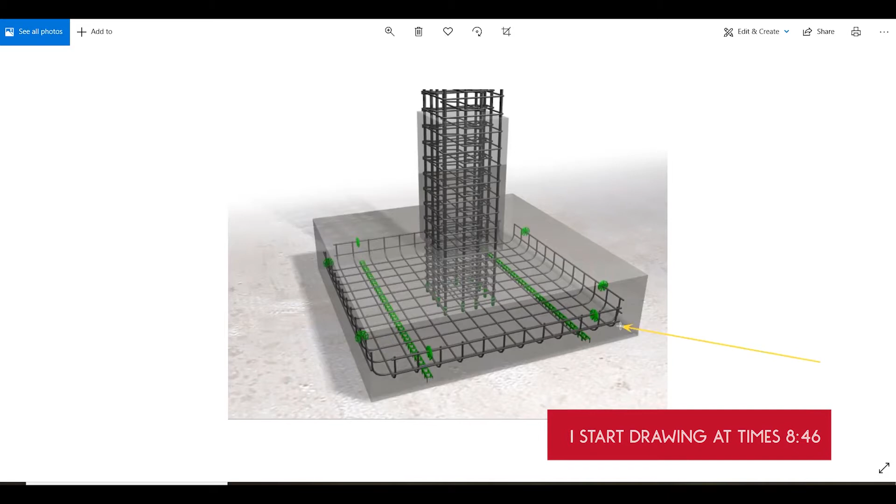We can just outline down here the concrete base. This is the concrete base, and this is the depth or the thickness of the base here. But what do we see inside? Inside we see the steel stirrups and the steel bars, all plaited and joined together to help make the frame stronger, right?

This would be considered the column shaft around here, going all the way up to where we will meet the floor level. Or sometimes these columns go all the way up to the roof level.

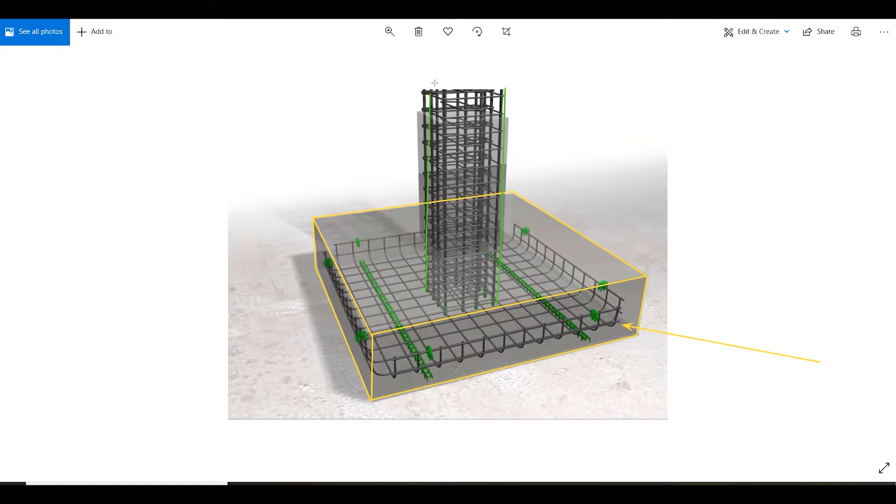But this is typically what a pad foundation looks like when we look at it in an X-ray style - X-ray meaning that we can see right through the materials, and we can see what the materials inside, how they are composed and how they join together and create a unit.

So let us clear this and move on and look at another example. This shows the same thing, however, this shows another view.

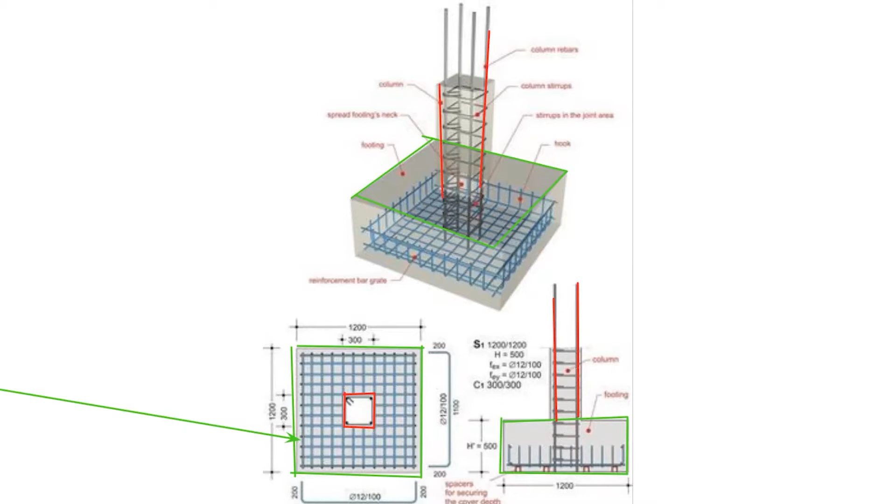And now I'm just going to indicate where the column starts. Column is right here going up, and these go up, and that would occur somewhere around here. So that's how the whole thing looks like when we look at it in isometric and in orthographic projection.

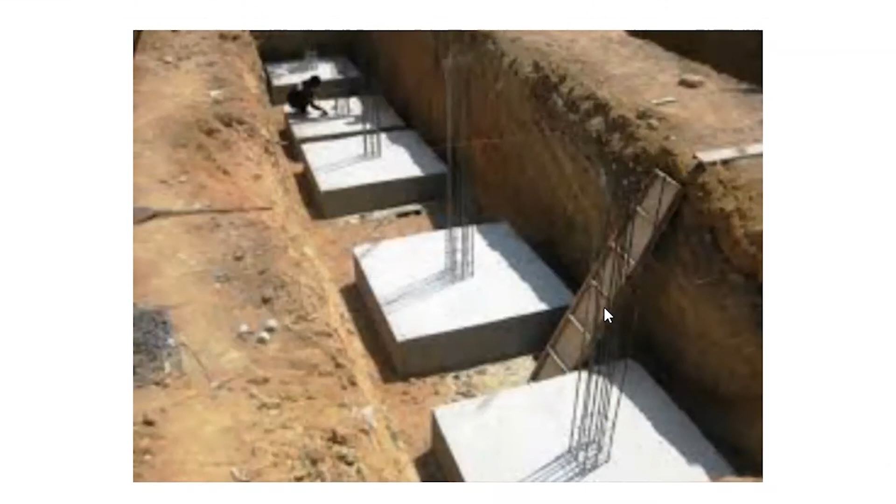And let's look at it now when you would put this down into the ground, when we dig a hole and we place this structure into the ground. This is what it will look like here.

I think this is fairly easy. You can see to the left and right is the ground, and you can see the columns there placed. So we see 1, 2, 3, 4, 5. And if you can observe, there's someone over here working on the column. So that's about it when we think of pad foundations.

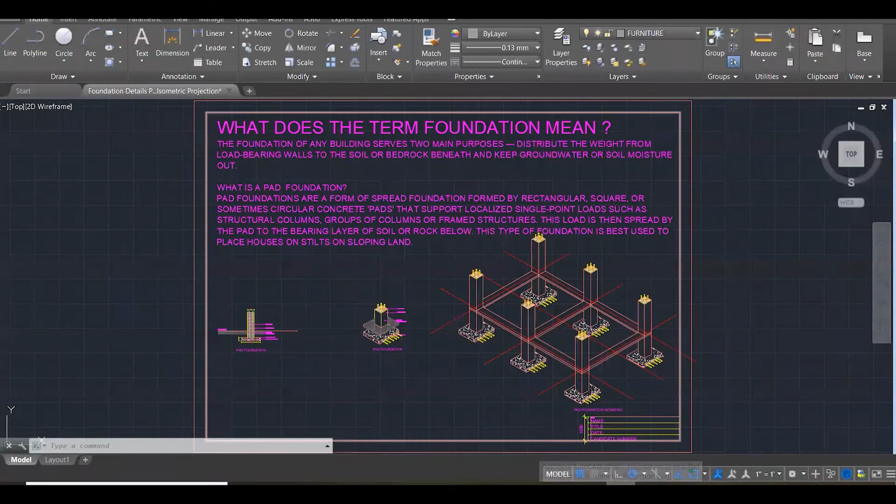And now let us go back over into AutoCAD. I need to show you guys what this will look like in three-dimensional form. Right guys, here is the pad foundation, and as we can see the base that is on the rectangular base here.

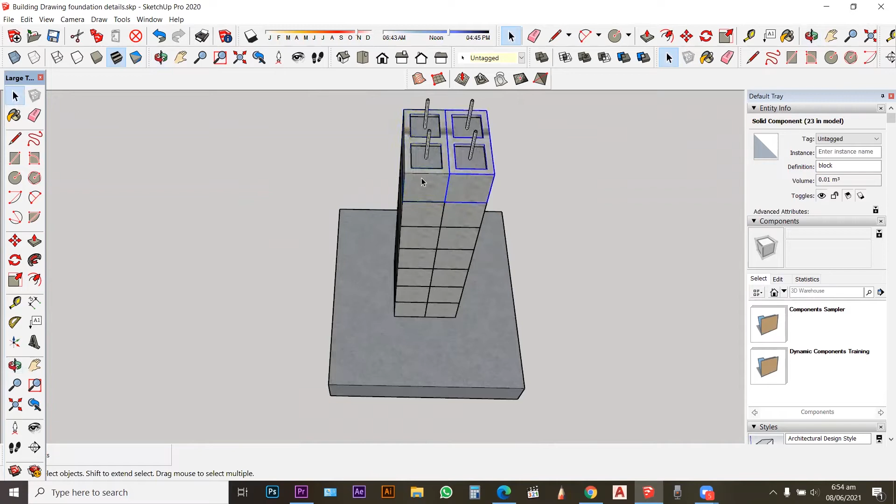And then we can see the block wall coming up, and we have 1, 2, 3, 4, 5, 6, 7 levels of blocks being stacked. And if you recognize that these blocks are also doubled up, which gives the whole thing a square look.

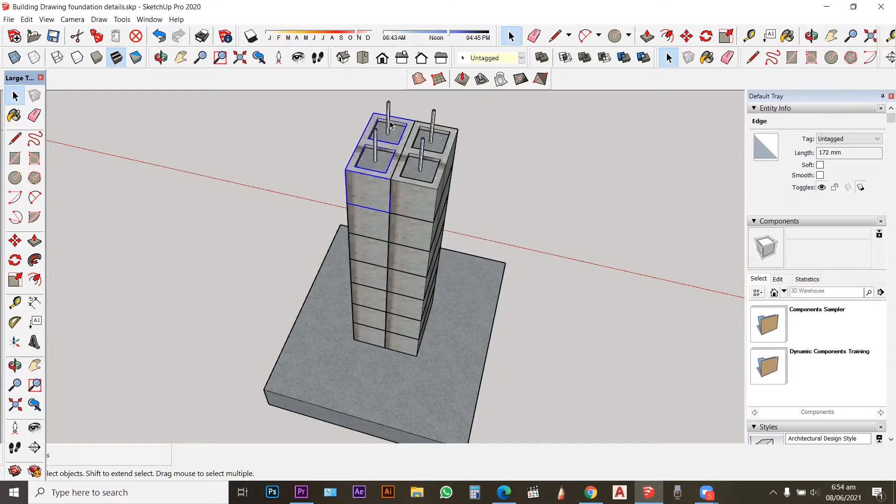And this is how the column would be created, and this is a pad foundation. And finally, we can see the steel that comes from the ground, from the base all the way up through the opening holes of the blocks. And then this would be tied to the beam at the top. This is what a pad foundation would look like when we just orbit around it.

We are going to be drawing this pad foundation in orthographic projection, and then we're going to come over here and draw it in isometric projection. But what we have over here is an isometric projection of a series of pad foundations all linked together. So we have 1, 2, 3, 4, 5, 6, and they are all connected. So this one shows a pad foundation in isolation, and this one shows pad foundation as a unit, to create one.

If this were a floor here, this would be the span, and we will fill in here as our floor level, in these two open spaces here. But let us get straight to what we're going to be doing.

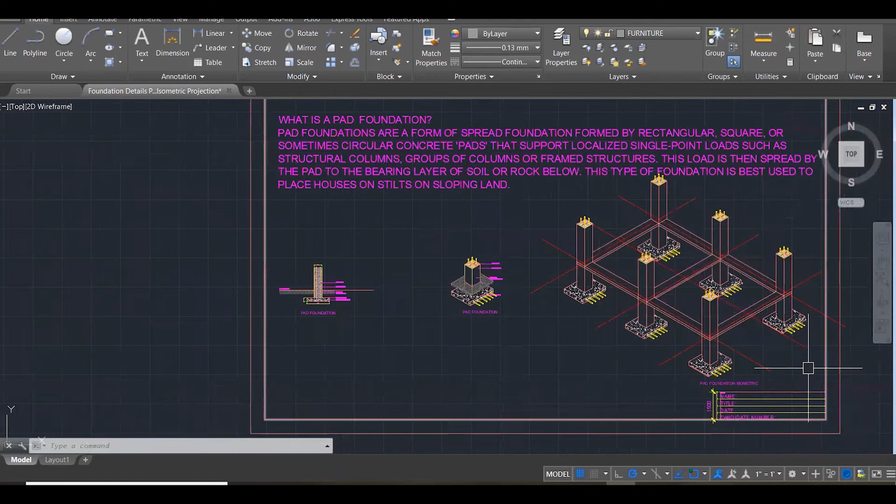Pad foundation, orthographic projection first thing. So let's look at this drawing. I'm going to reproduce this drawing, but let's read the drawing so that we can understand.

We are going to be using 200 millimeter blocks, but side by side, so that will give us a thickness of 400 millimeter. That's the first thing we need to observe. That's what that 400 millimeter stands for.

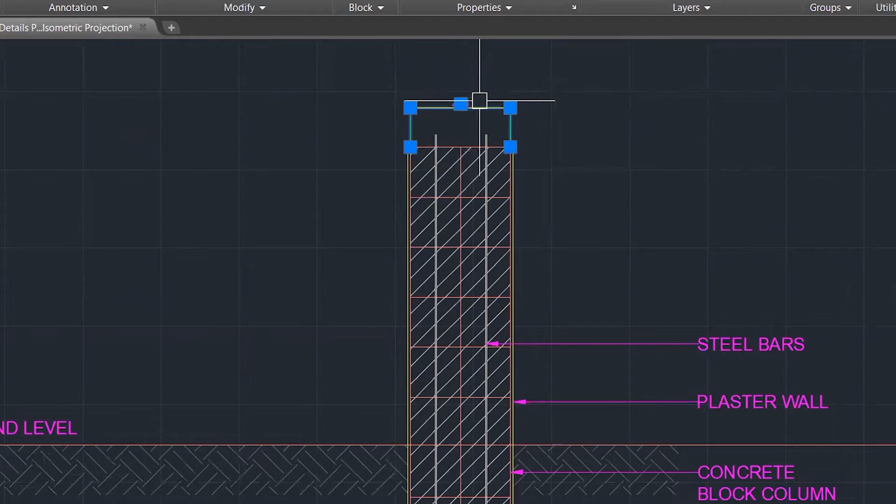What's the thickness of our base? The width of our base is 1200 millimeter, and the thickness is 200 millimeters. So that's a rectangle, 1200 by 200.

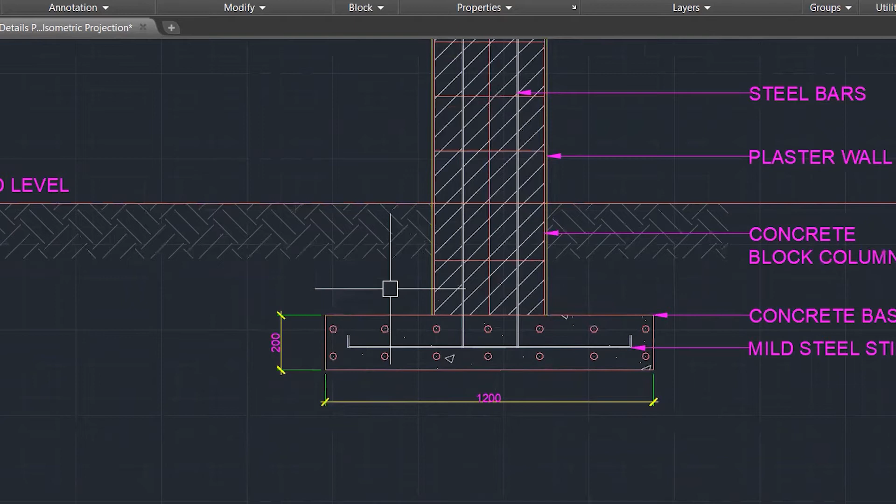And I usually go 7 courses of blocks, 1, 2, 3, 4, 5, 6, 7, 8. However, I went to 8 this time. You guys at home can go 7 or 8. Doesn't really matter.

So let us start off down here. I always struggle as to where to draw, because I want you guys at home to be able to see as I'm drawing what the finished product would look like. So I'm going to probably start here.

So let me go on to my outline layer, and let me change this over to the ortho mode. To access your ortho mode, it's down here, you can press F8.

So let's go 200. Let's go across 1200. Then go up 200. Let's connect this right here. So it's been connected there.

Let's find the midpoint of this. I find the midpoint, and then I project a line upward.

Now I'm going to offset 200 to the left and 200 to the right. Remember, because our bricks are 200 thick, but they're 2 courses laid next to each other, so that's a 400 thick wall. That's what our column is going to be, a 400 thick millimeter column.

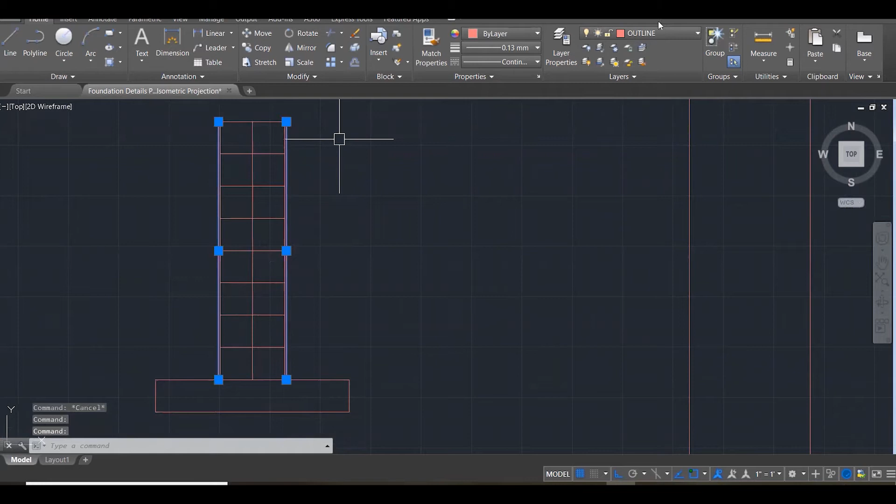Now we don't really see that, so we need to put this into a different layer. So I'm going to come in, zoom in, and select these two outer lines, and I'm going to put them into my construction layer so that from a distance we'll be able to see the plaster walls.

Let me put this back in frame. Now, what do we need to do? I need to assume a ground line. So I'm just going to randomly put a line. That's my ground line, right?

Sometimes I like to connect. Yeah, that's like that, that's a ground line. Now I'm going to offset 100 down because I want to give my ground a thickness.

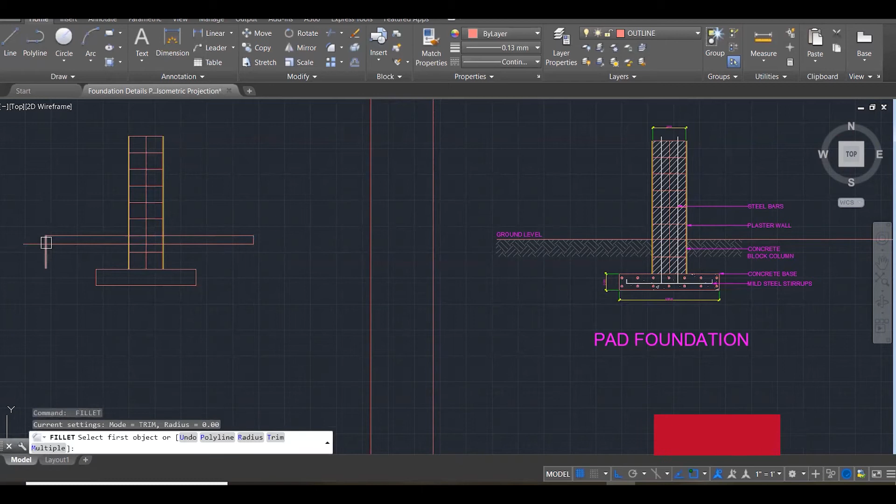Doesn't matter, well, I try to give it a reasonable thickness. The reality is that the ground goes infinite, so you can't really give any thickness for the ground. But however, in representation, we need to give this ground a thickness. So I've just given that a thickness of 100mm thick.

I think I might increase that to another 100. Yeah, it looks like it's a bit too thin. So what I'm going to do is I'm just going to grab this.

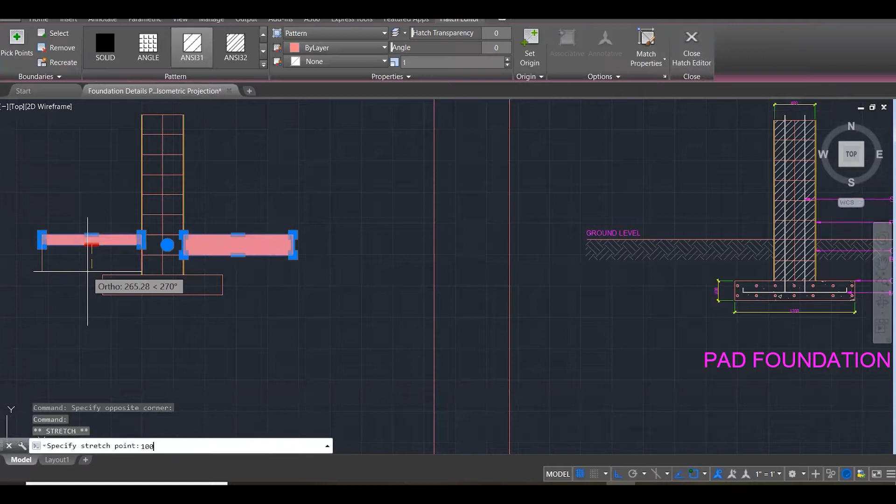So I can remove the bottom line here, and I'm just going to grab the hatch. Then I'm going to pull this down 100. Yep, do it on the right, no, do it on the left. Pull down this solid hatch 100. I always grab the midpoint here and I stretch it.

So now I'm going to match prop this, MA, to match prop. I'm going to grab the ground level hatch from this already drawn, this finished drawing, and I'm going to transfer it over here.

So there's our ground level, and that's our columns, this is our concrete base. Now, we need to hatch in here.

Just place a solid in there and match prop this. Come over here, match, prop. Simple like that. So that changes to concrete.

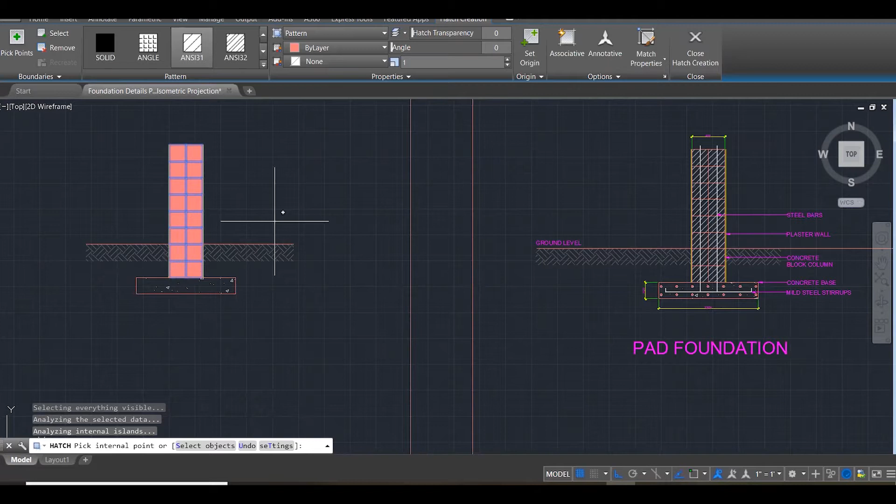Now what we need to do is hatch in here next. Again, I'm going to fill this with solids and then just change the pattern. So it's all done. Matchprop MA, or we can go out here to match properties.

So far so good. Now we need to add some notes to this, and we need to also add the steel. So let us put in the steel.

I'm going to zoom in here and start by putting the steel in. I find the halfway point, project a line to the left, to the right, and I'm going to find this halfway point here. Oh no, we can't find that.

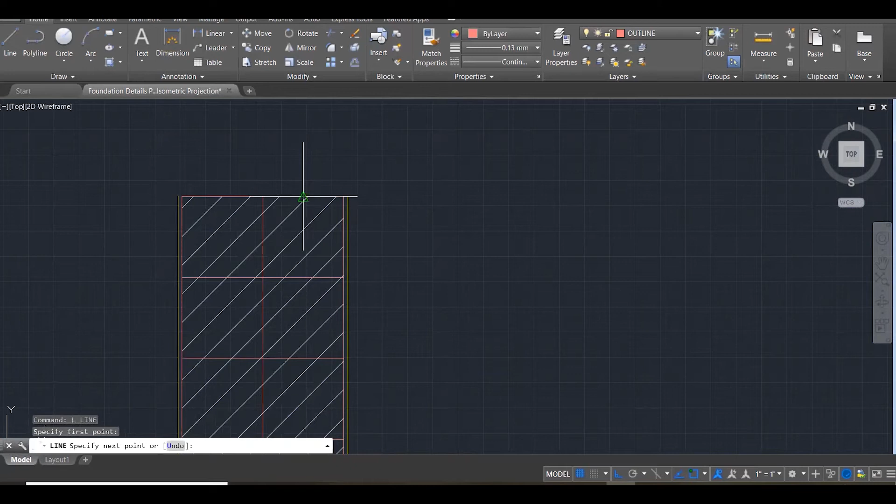So what I'm going to do is break this line there, extend that to there. Now I can find the halfway point there. Now I can project this down so that connects there.

I'm just going to project the steel slightly above the course of blocks. I'm going to copy this, CO to copy, grab that line and place it over there.

Now I want to place my steel in a different layer. I'm going to place my steel in my hatch layer. And that's my steel in.

Now I need to shape it. So I'm going to offset my steel and give it a thickness of 10 mil.

Good. This is where I'm going to end my steel. Offset that 10 mil.

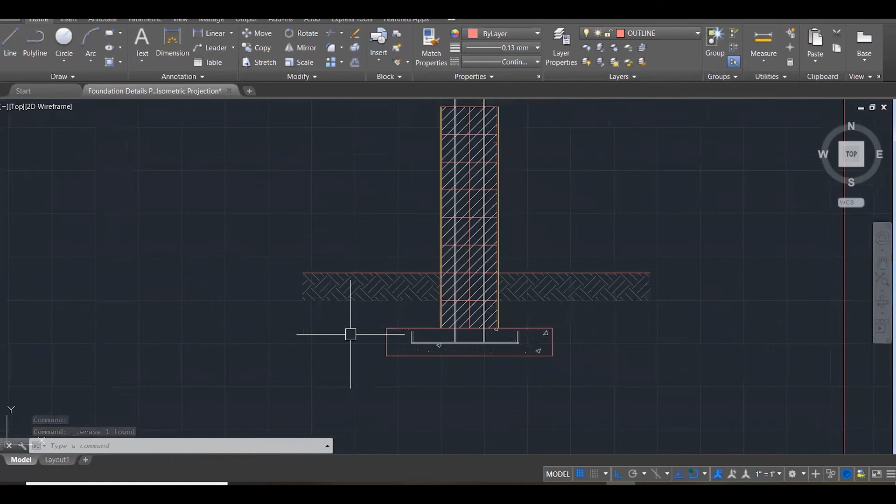Okay, so now all the steel is in now. Just going to make sure all the bars are within the same hatch layer. Okay, I think everything is good. That looks good. That's our steel in, and that's our stirrups.

Now what we need to do is put in our steel bars, and I'm going to grab them from here. Actually, no, I'm just going to create new bars. I'm going to come here and create a bar circle.

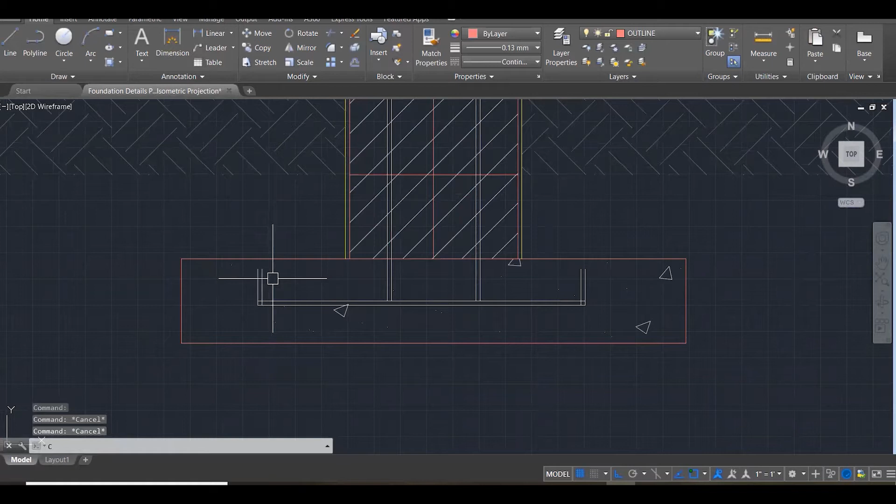I'm going to make my radius 10 mil. Yeah, that's it there. And I'm going to place these in here.

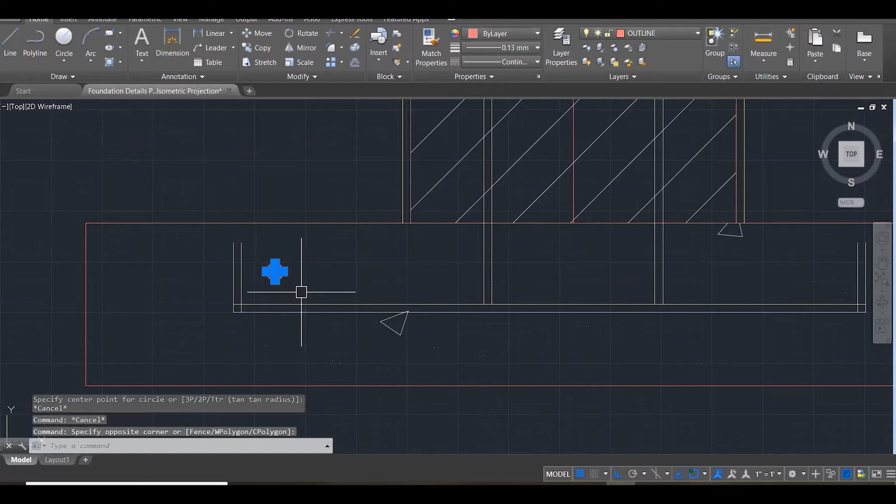I said distance. What distance am I going to use? So let me just draw a line. You know what? I'm going to divide this here, div, to divide this line. And I'm going to go with something like 8 divisions, right?

Now, why didn't I see the divisions? I need to adjust my point style. And now the divisions appear. It's good, perfect.

So I'm going to place them down here, and then I'm going to move them up like this now. Grab them all together, and then let's go copy. So we get a set of bars there, and we get a set of bars under here.

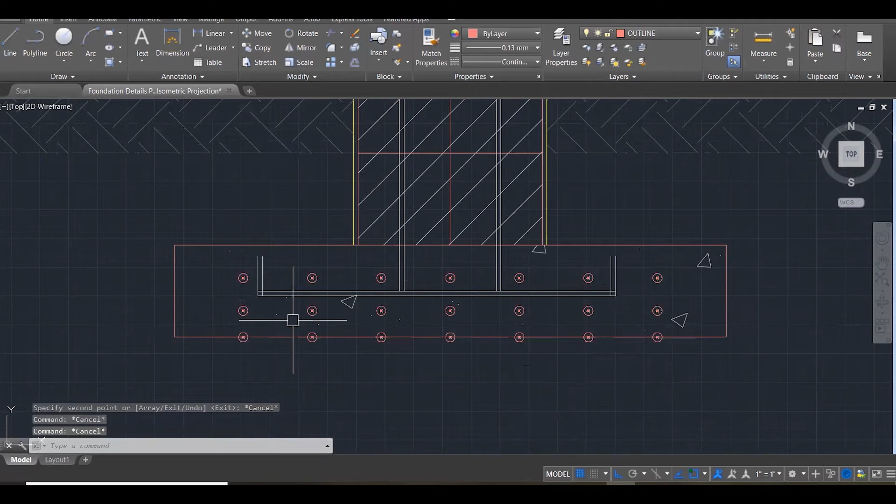I think that's good enough. And then I can delete those. So those are my bars in there.

Let me take off my point style and put it back to a point, or speck of dust as I like to call it, so that we can't see it any longer.

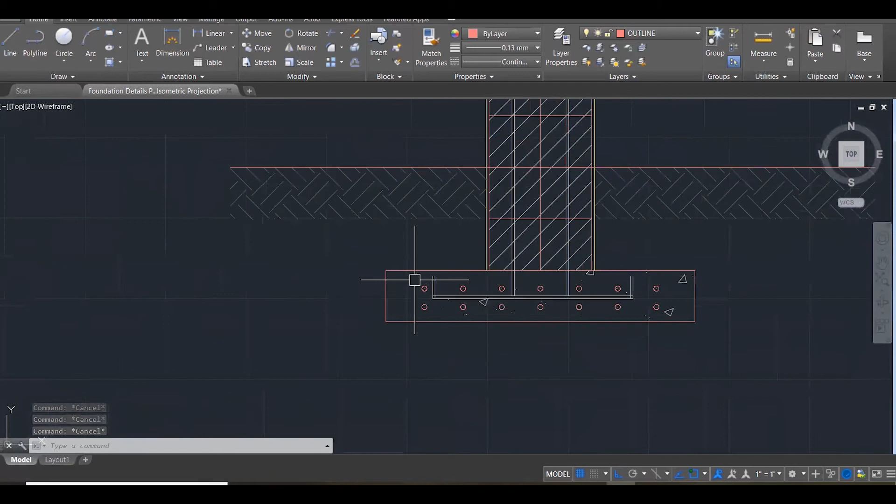Now, change these bars and place them into my hatch layer. Okay, that looks good.

So that's a good representation there. Now let us transfer the labels.

This line here is the ground line. This is the line that you will be walking on when you're approaching the building. So let me just identify that.

Grab the note here from on this drawing, and we'll just place it here, right? That represents the ground level.

Now, let's set up a margin over here, and I'm going to be placing in some notes. So I'm going to go over to my text layer, and let's see what we can place in here.

Let me just move this whole structure closer so that we can see what we're doing. Okay, so the first thing we need to do is identify what happens here down at this sub level.

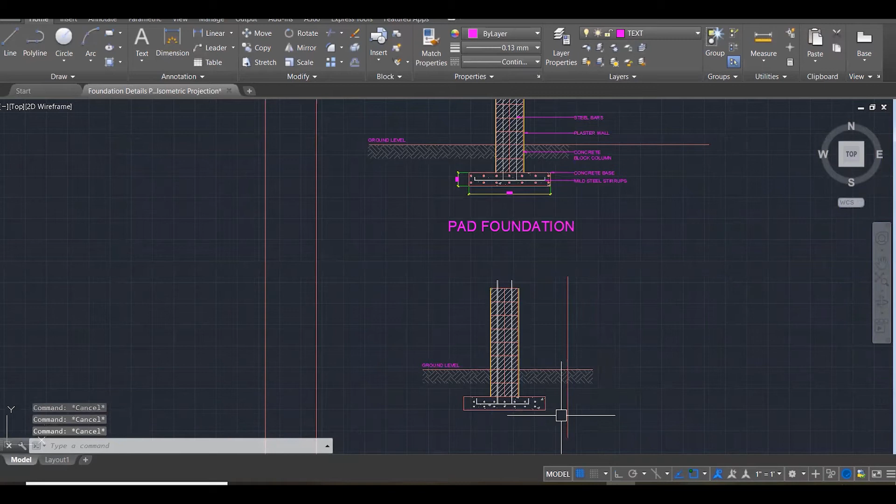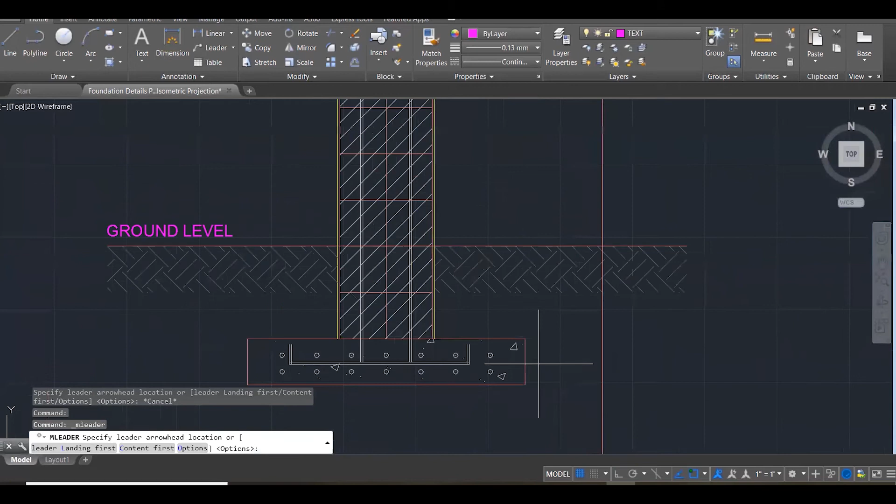What I call the sub level is the level that's under the ground. So I'm going to identify this, and that is our concrete base.

And now let us come up. These here will be bars, steel bars.

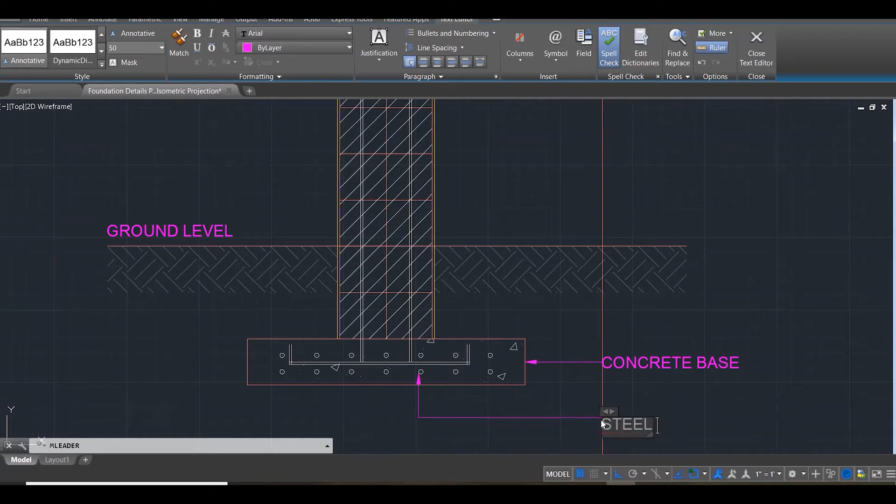These are the steel bars. And these will be the mild steel stirrups. Actually, I'm going to label this as the mild steel stirrup here, and then identify the bars somewhere else.

Right, mild steel stirrups. Over here now would be, let's call that the plaster wall.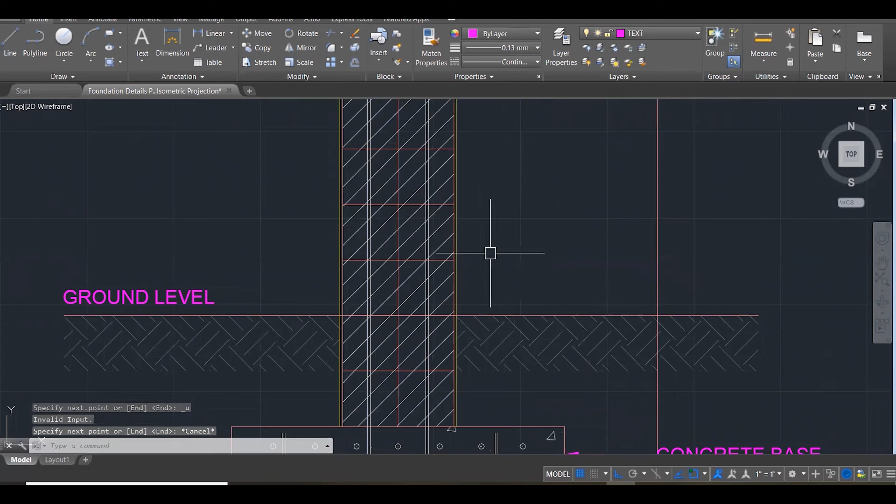Oh, that's not straight. That's not straight. Plaster wall.

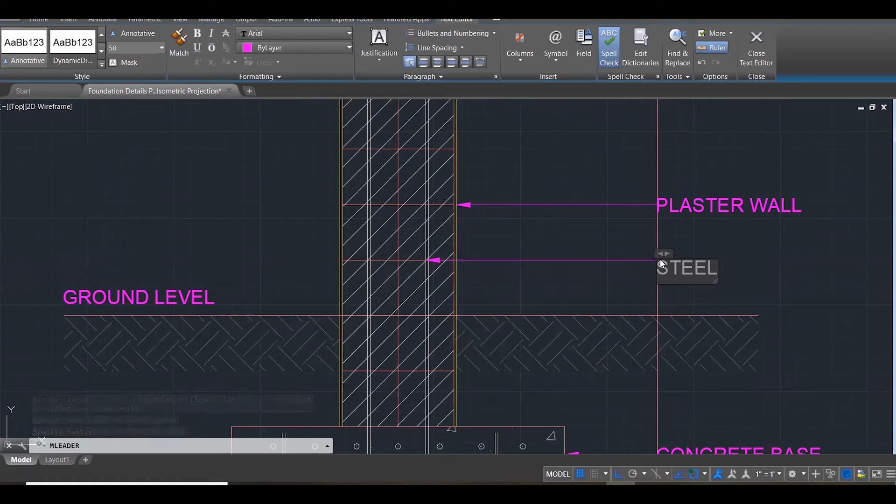Steel bars. And this will be our block work.

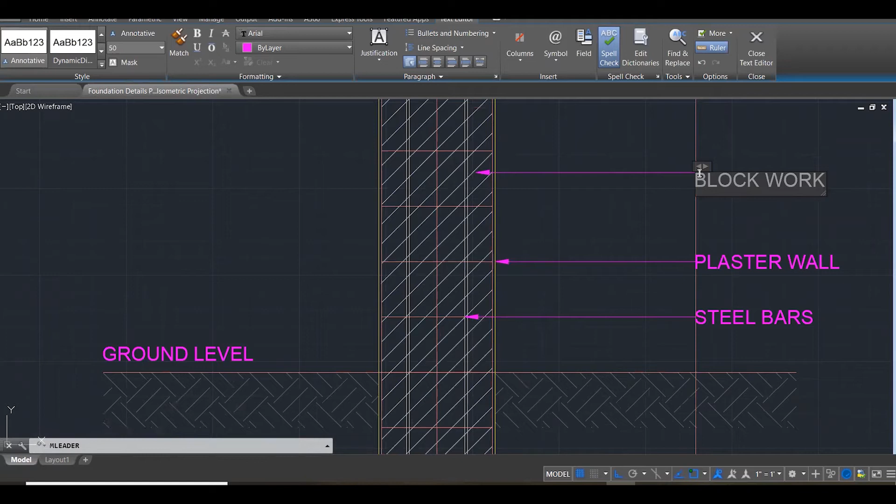Block work to form columns to create. Let me just put here block work slash column wall. Column wall.

I think that's it. So we got our block work, which is the column wall. We got our plaster wall. We have our steel bars. We have our concrete base, and we have the mild stirrups.

And these are the main things that we need to identify so that we can demonstrate to someone that we understand this detail. Now I'm just going to remove this line here. This was a margin line to make my notes very neat.

I'm going to copy the word pad foundation up here and bring it down, so we know what we're doing. That's the first part finished, which is drawing the orthographic projection for the pad foundation.

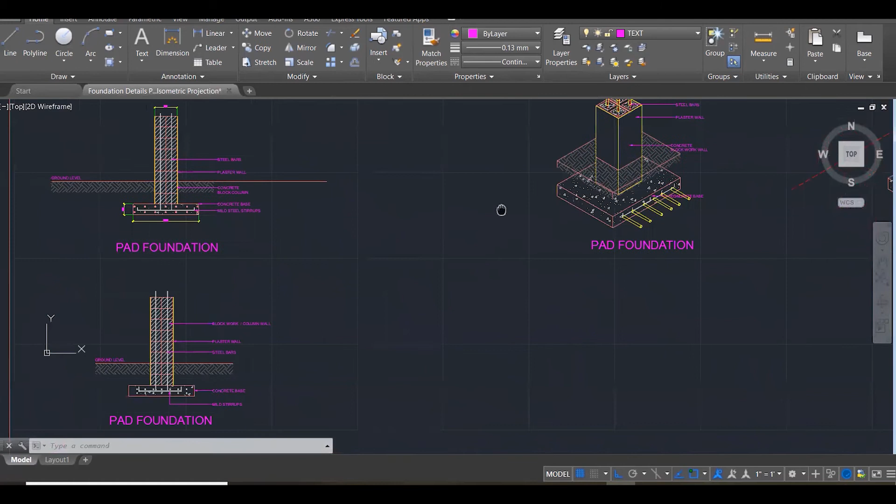Now let's move over and do the isometric projection. In doing this, I want to use a different technique. Before, you guys saw me go over to isometric drafting and turn that on, but I'm not going to use that as the main tool today when drawing this isometric.

I'm going to be using polar tracking. Let me show you how I'm going to set this up. Watch closely - I'm going to open up the arrow, press it, and choose my tracking settings.

Now, I like the tracking setting 30, 60, 90, 120. Why do I like that? Because it allows me to draw my isometric projection without having to switch the tracks every time I want to change direction.

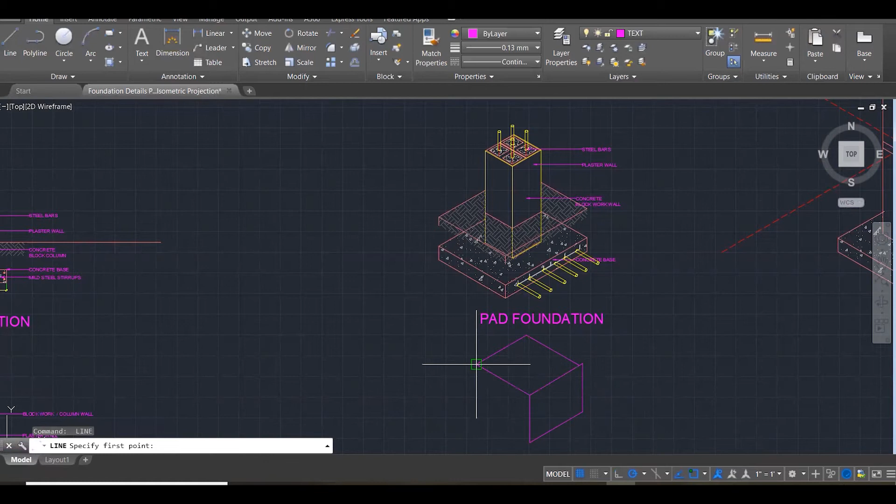Let me show you this quickly. So I can draw - that's 30 degrees - and then I can come up, and do things like that, right? That's simple, without me having to switch the track. This is just an example of how I'm drawing without switching the tracks.

If I were using the ISO drafting, if I want to go to the left, I will have to stop and come down here and switch over to the left track. If I want to go to the top plane, I will have to switch from left to top plane. But in this polar tracking mode, you don't.

Once you know the direction you're going, you just hint the mouse in that direction and it will provide the angle needed for that direction, and the angles are all preset. I hope you guys understood that. Let me demonstrate how I'm going to use this tool now.

Okay, so let's draw the base first. We know our base, we go up 200. Then I know I'm going to go across 1,200. And then I know I'm going to come back down 200. Then I'm just going to join that there. So that's our base.

This also goes 1,200. Oh, oh boy, I dropped it. So let's do this again.

Up 200, across 1200 at 30 degrees, come back down 200. Let's connect that there. Good. So that's one face drawn.

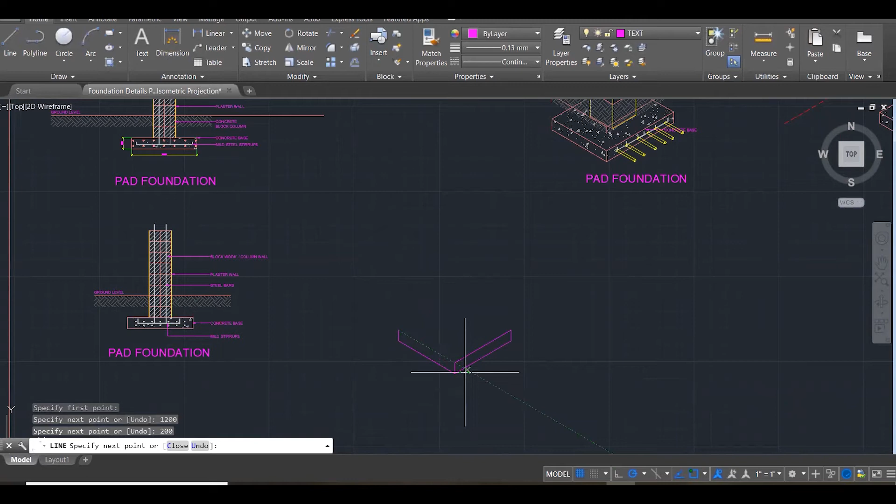And then I'm going to draw the receding face down 1200, go up 200. So that's my receding face there, and I'm going to copy that. Done, done. And that's how we get our box, right? And these are the parts that we're not going to see.

So that's cool there with me. Let me just put this into the proper layer, which is outline. And on that note, I'm going to go onto my outline layer and continue drawing from there.

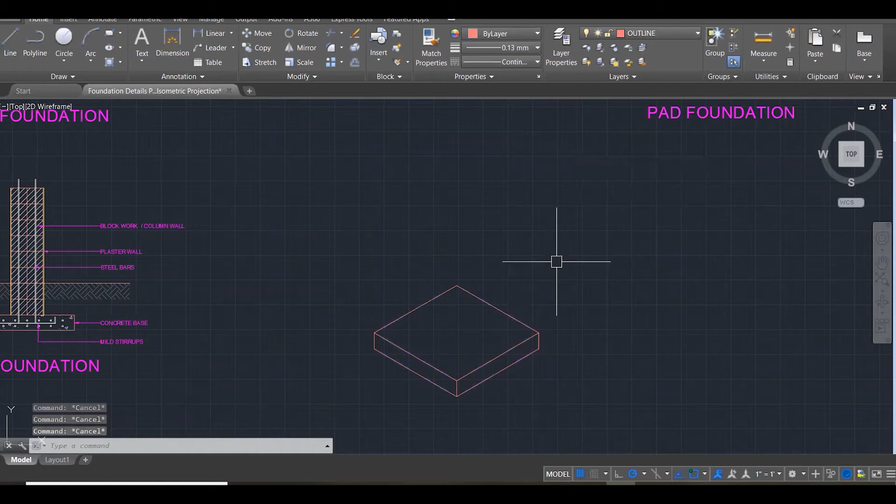So now that we have this, we need to establish the midpoints, and these are our midpoints. This is where I'm going to cast up my 200 millimeter wall.

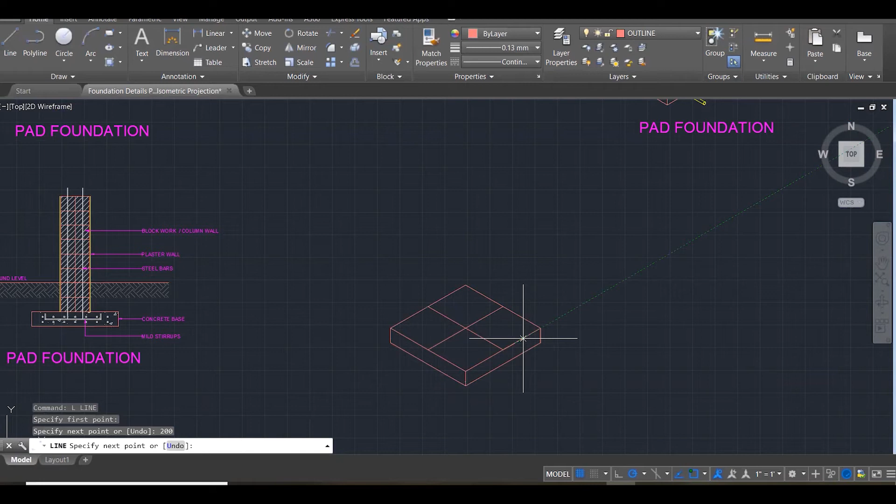Now, let's go here to the left and to the right, 200. Let's go 200. 200 in this direction.

Okay, so we should have something like this. We should have a square in there. Now what are we going to do with this square?

Now we're going to go up and project this upward. And I'm going to trim in here because we don't need these pieces. Let's copy this around.

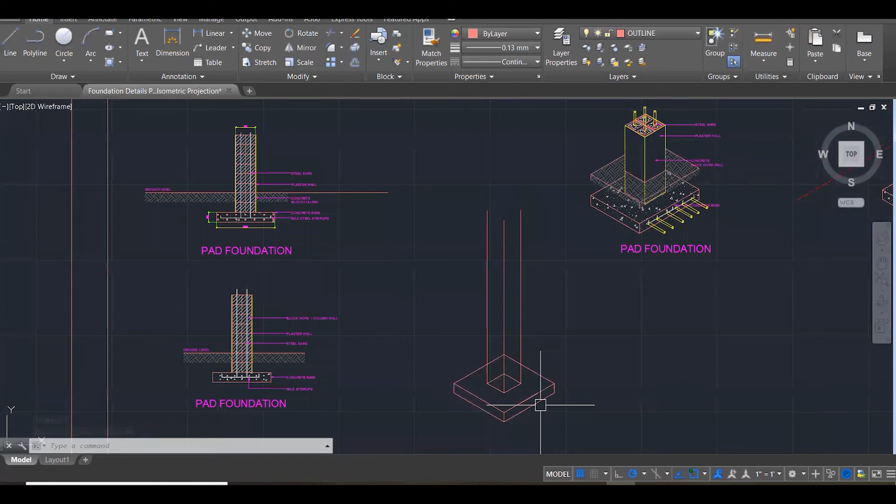Let's remove these bits, we don't need these bits here. Serves the purpose, and now this is it, but we don't need to detail this. So let's assume a point where we're going to stop, and I think I'm going to stop around here. So I'm just going to - yeah, that looks good. Let's trim off here.

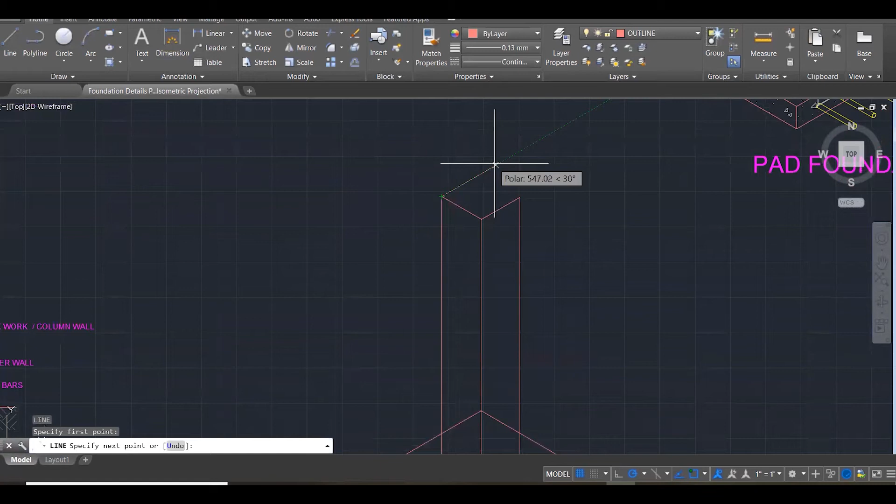And again, I just assume a random place. You guys got to get the idea of drawing random sometimes - there isn't any measurement, you're just drawing it in the form of sketching. So when I say draw random, this is a random height, not a height that I'm trying to match from here, because the height doesn't really matter. All that matters is that you express the detail. It doesn't matter the height, it can go up to whatever. Just get it drawn, so stop worrying sometimes about not knowing the height, and just put in a height.

All right, let's go on now.

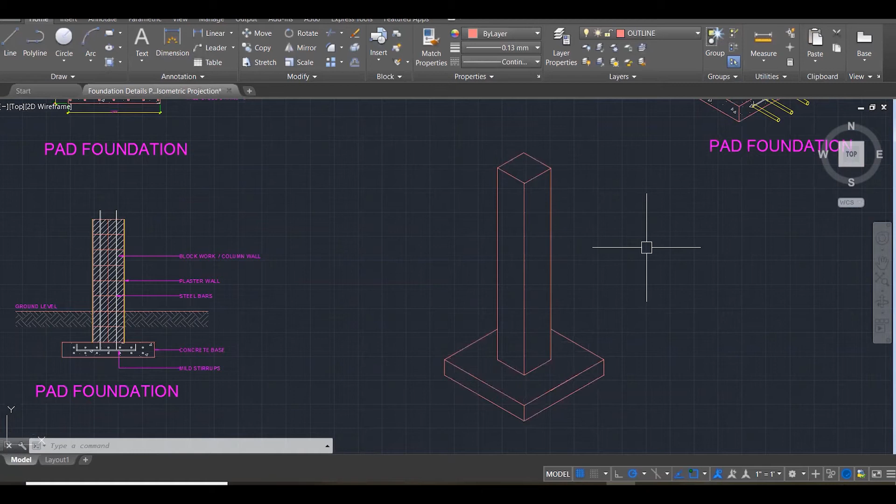So this is our column connected to the concrete base in its raw form, just like that. Now what we need to do is detail this. Detailing is a way of expressing this so someone can better understand what is happening up here.

Let me offset 25 mil all around. Why am I doing this? I'm actually inserting the holes that go in here - these 4 holes.

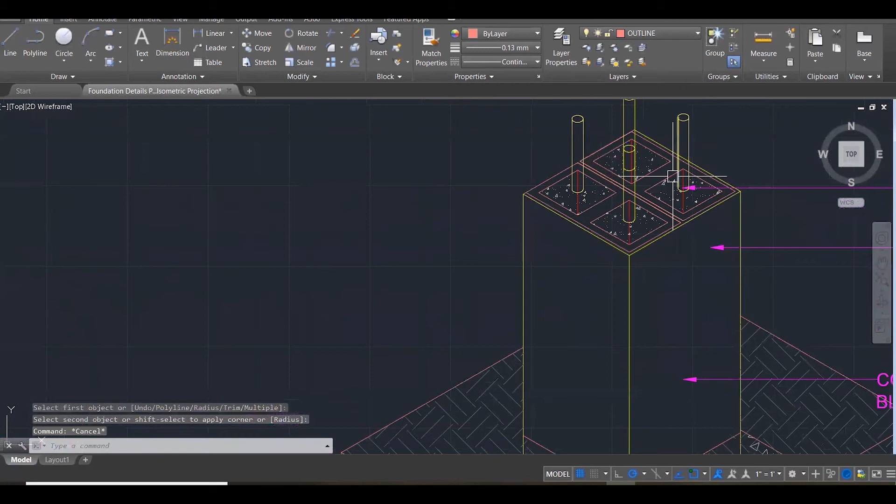So now I'm going to find the midpoint here, connect it down to there, and offset 25 to the left and 25 to the right. Then find this midpoint here and do that, offsetting 25 to the left and 25 to the right again. So now I think I did enough that I can insert my holes there, right?

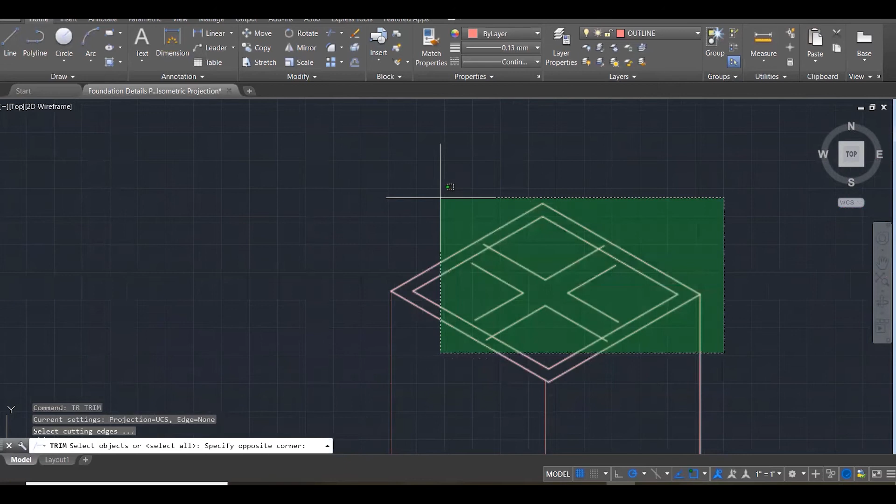Let's trim this. Let's trim again. Okay good, just put that in there.

We'll come down to there. I really like joining this with polar tracking mode.

I saw a student of mine join with this, and it impressed me. I decided to try it out, and I realized I don't think I'll ever really go back to using isometric drafting mode. It slows you down, and I'm all about doing things quickly, shortcuts, moving as fast as possible, and getting the task done. So I generally wouldn't use that anymore. But however, if you're comfortable using it, then go ahead.

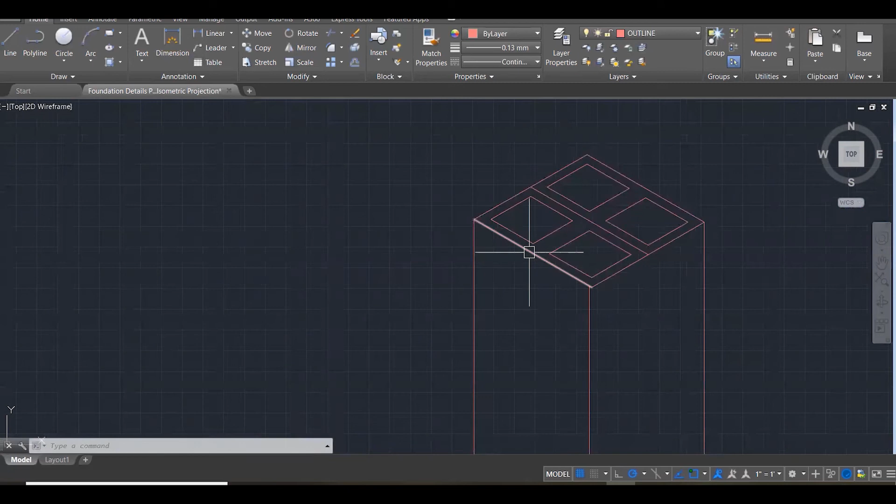So now those are my blocks or bricks laid in there. And again, we know that this goes down, so I can show this now. This is not on, let me move this over to there. Okay, that looks good. Let's see what's happening down here - this needs to be adjusted somehow.

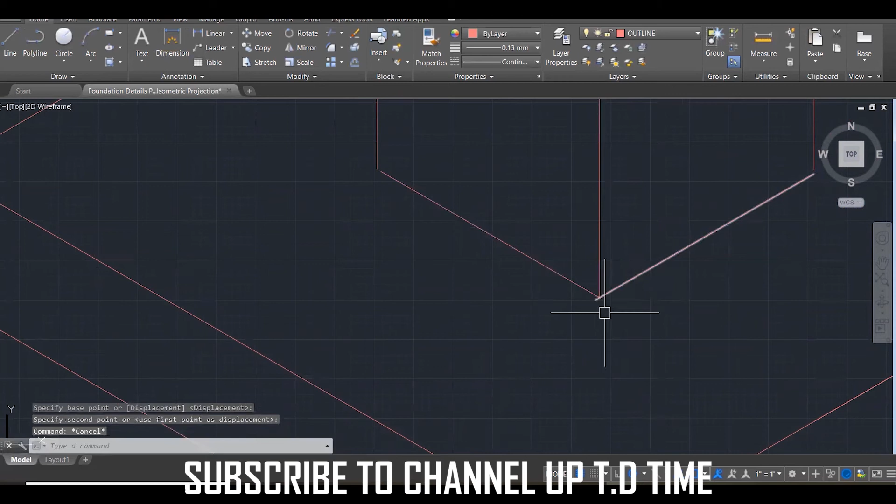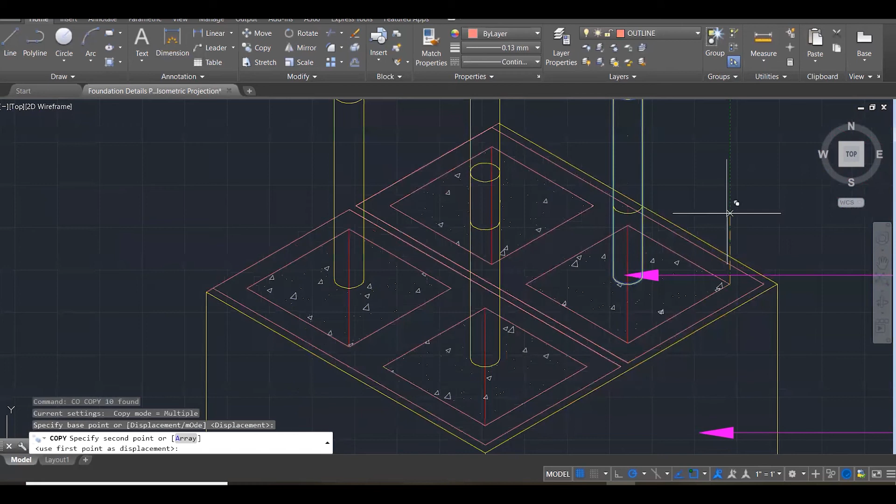Cool, all nice and clean. Now at the top of these holes you will find steel, so I'm going to insert my steel there. I have the steel drawn already out here, so I'm just going to be copying and pasting. I'm not going to spend time drawing over these steel bars - not today. Just copy and paste.

To draw these steel bars, you would have to work with an isometric circle - you would draw an isometric circle in top plane to get these steel bars in at that point. I think that looks good so far.

And now we need to insert the steel bars that you would find on the concrete base, which are these steel bars here around here. So I'm just going to grab one.

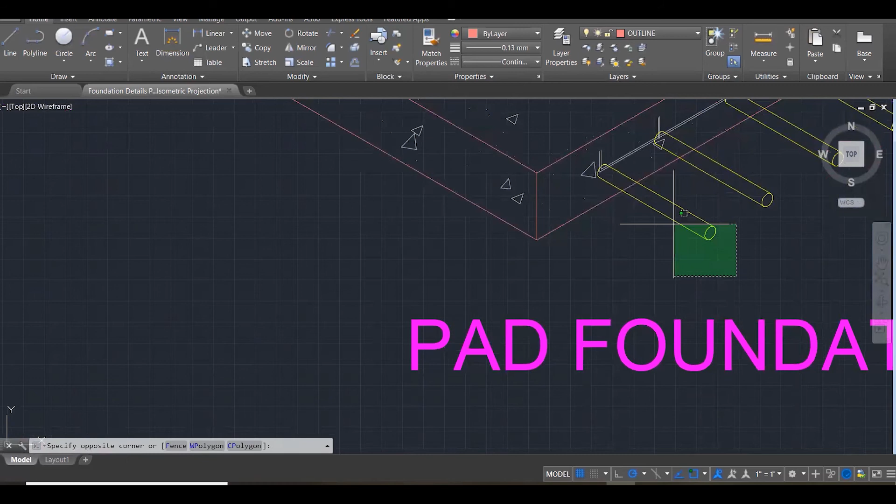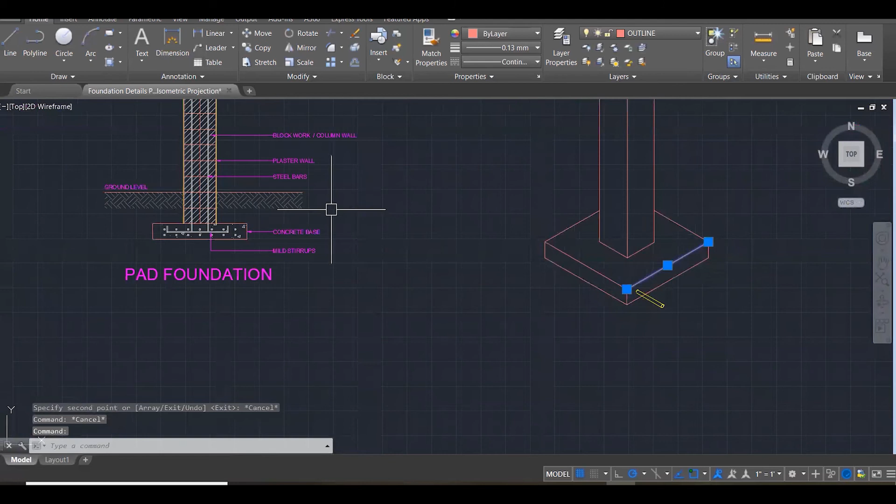All right, now it's time for me to insert. I don't have any reference point, so I'm just going to place this first one there. What am I going to do? Divide this - how much did we divide last time? We divide this into 7 pieces. Can't remember, so let me check. Again, I think it's 7 pieces. Let me turn on my point style so that we will see.

So what I'm going to do is copy this now, grab it, stick them all here, and then I'm just going to move them down onto the midline. All right, good. Now let's see how to do this.

Move there, then fillet that to there, then fillet that to there. No, so that can go - yep, that can go. So that's how we inserted our steel.

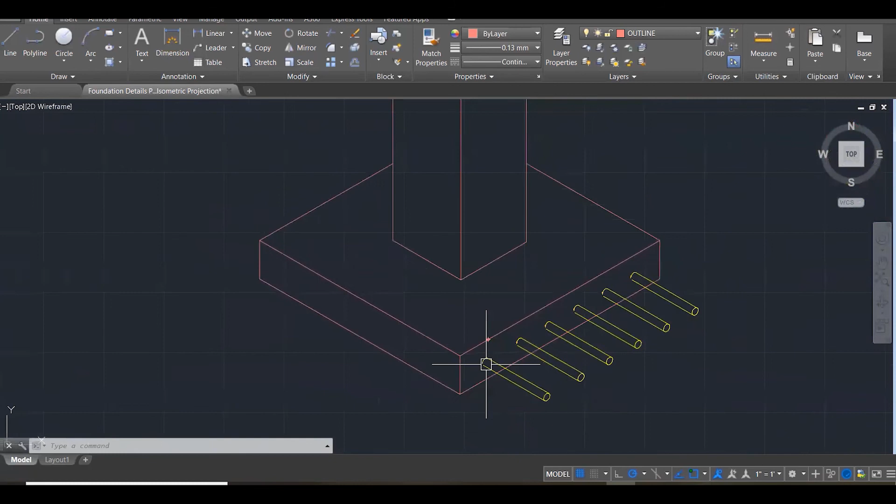Piece of the circle I didn't bring over - I didn't bring over that other bit of the circle. It's not a big problem.

We now need to show the mild stirrups connecting to this. I wasn't thinking - I could have left that line that I had here. Let me just do this at the end, just to indicate that, and project that across and do that. And give this a thickness, and my thickness is 10.

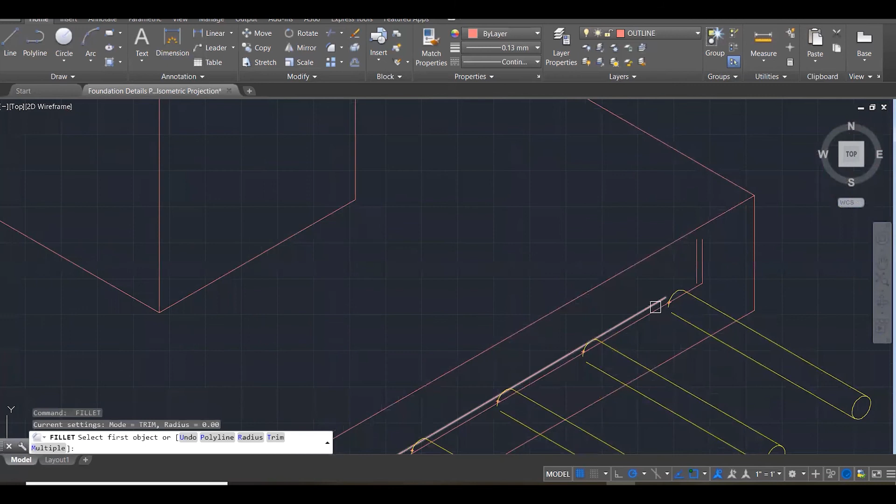Alright, make sure they're all connected - just the mild stirrup. And just place this into the layer that I'm using, which is my hatch layer.

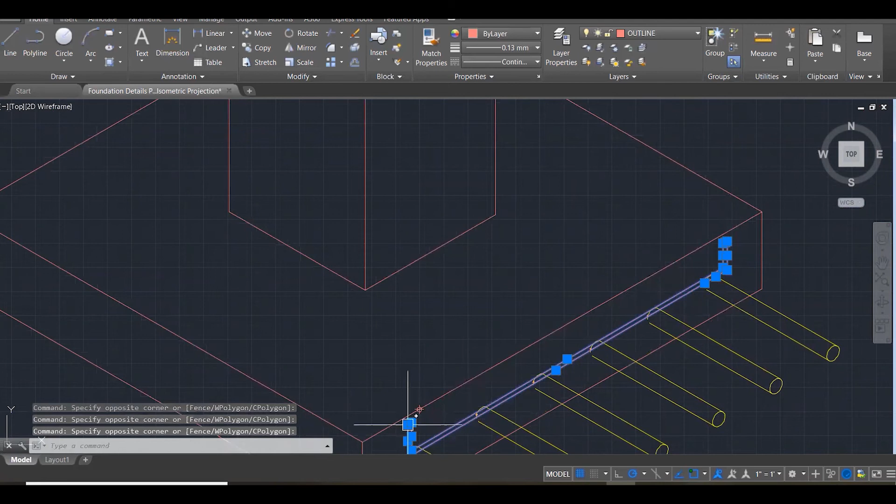Alright, and now we need to show these, and that they're offsetted at 200. So let's go copy, let me just bring this down - 200. Oh, that means this goes down 400. Boy, 600. And now this goes down 800. This goes down 1,000. And this goes down 1,200. And now 1,400.

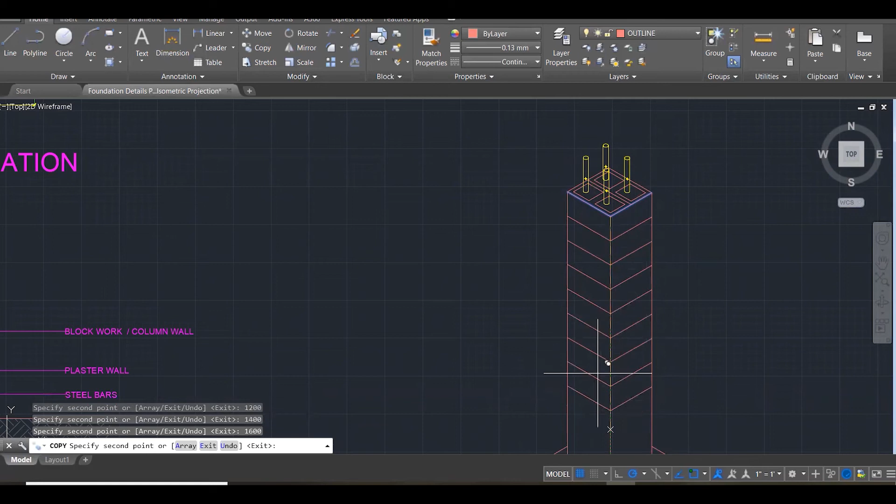1,600. 1,800. 2,000. Ding, ding, ding. 2,000. 2,200. Oh, can we get 24? 24.

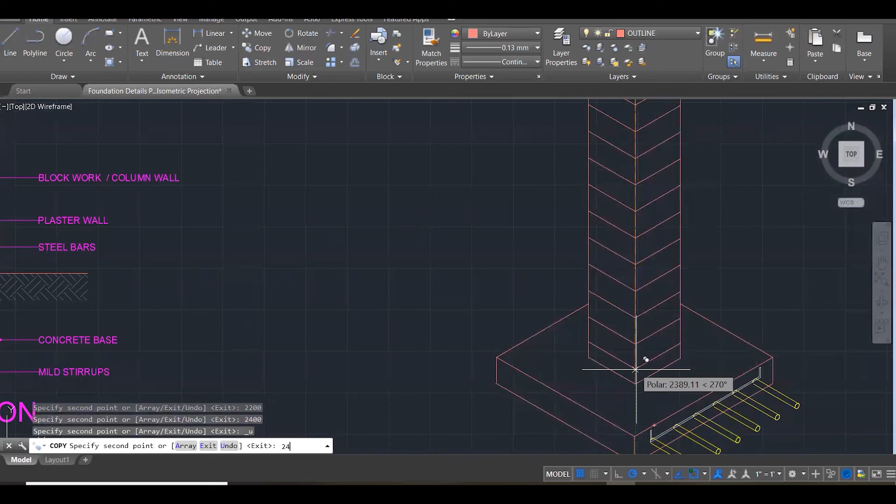All right, so this is what happens there. You know what, I'm going to do this. Boom, boom, boom, boom, boom. Gone. All right, so that's what it will look like with the bricks laid down.

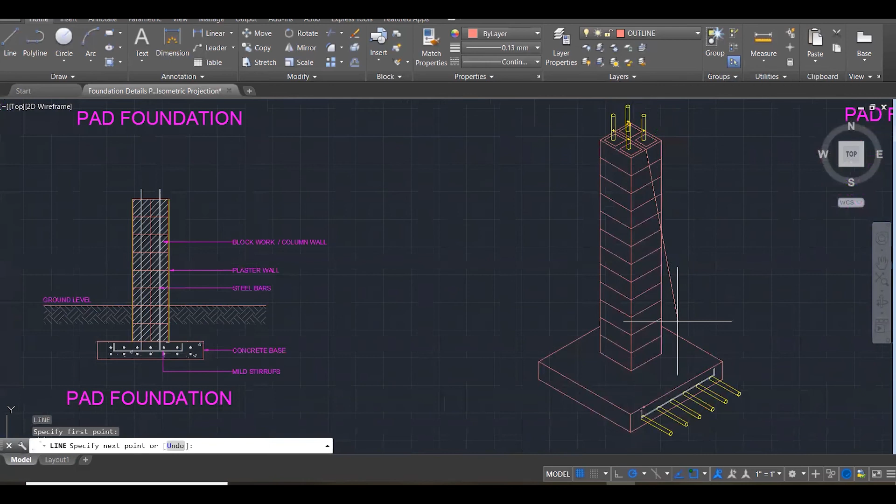You would see a midline right here. Separate these, so let me just insert that. Yeah, that's how that will look in its true representation.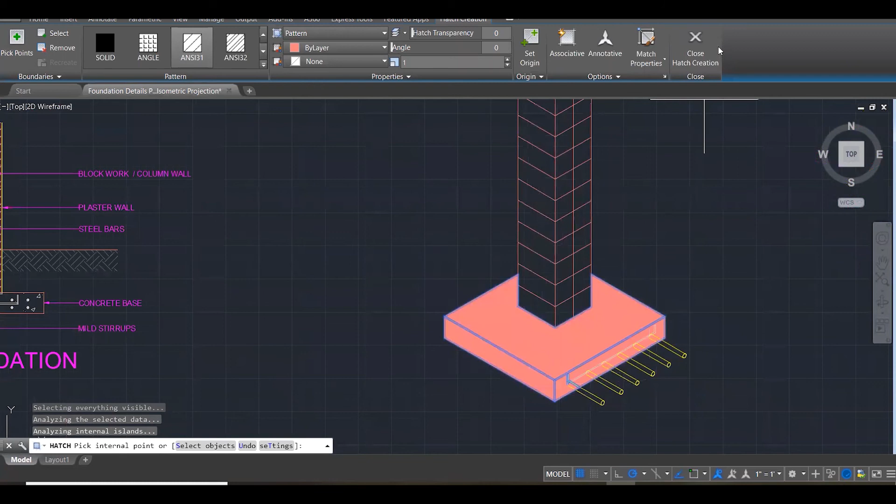Now we need to insert the hatch, so let's go for the concrete. I'm going to put a hatch in here, it's going to be solid, then match it to the hatch over here, which is the concrete. Yep, so that's our concrete base.

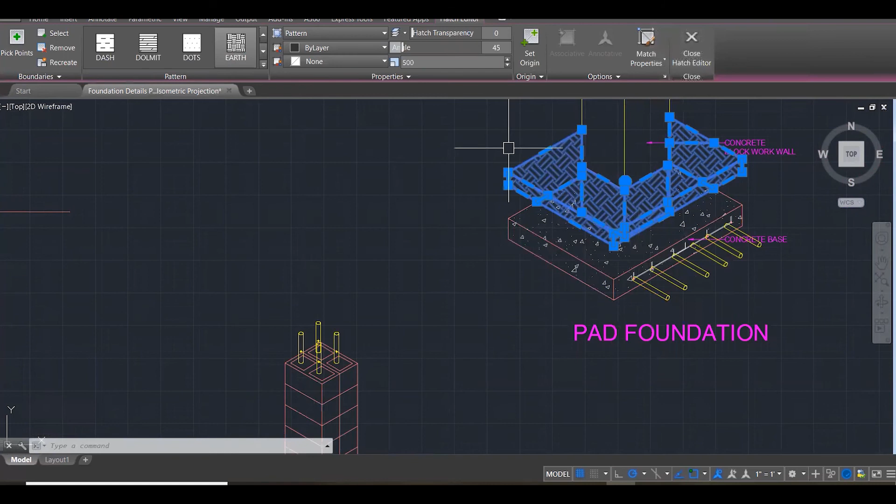This right here is our earth to show the level of earth above the concrete base. It's to show where a person would walk, but I'm not going to insert it in this detail, it might be a bit confusing.

So what I'm going to put in now is the concrete that is poured in here to fill in these holes and also to keep the steel straight. That's very important, so let me do that.

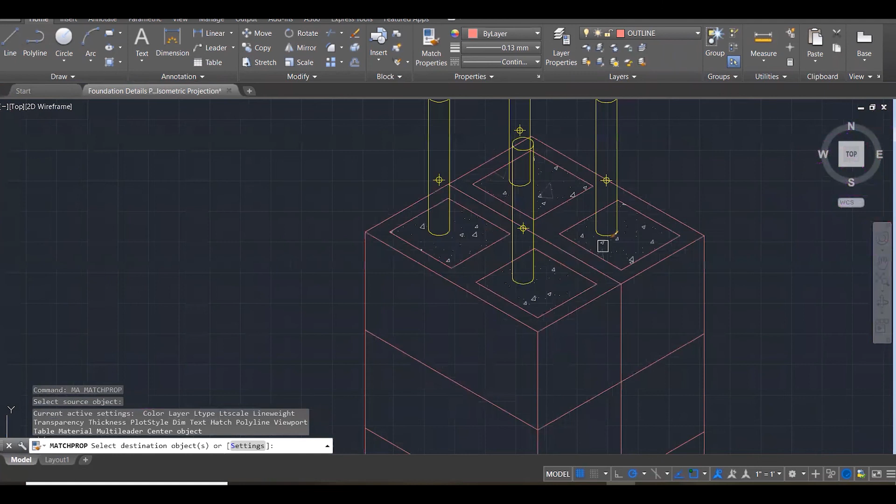I think the ones here are a little more dense, so let me adjust. Yeah, that looks better now. Let me take off my point style at this time and take it back to a speck of dust so we can't see any point styles on the screen.

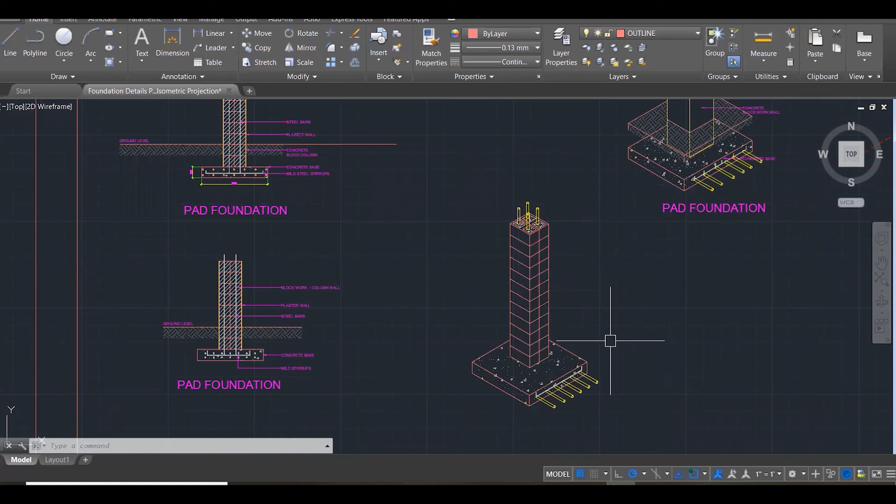And I think this is pretty much done. All that I need to do is label what I've done. So I'm going to draw down my margin again right around here, go over to my text layer, and select my leader, which is up here. Select the leader and let's point out some things.

That's the end, and that would be considered the steel bars. Steel bars.

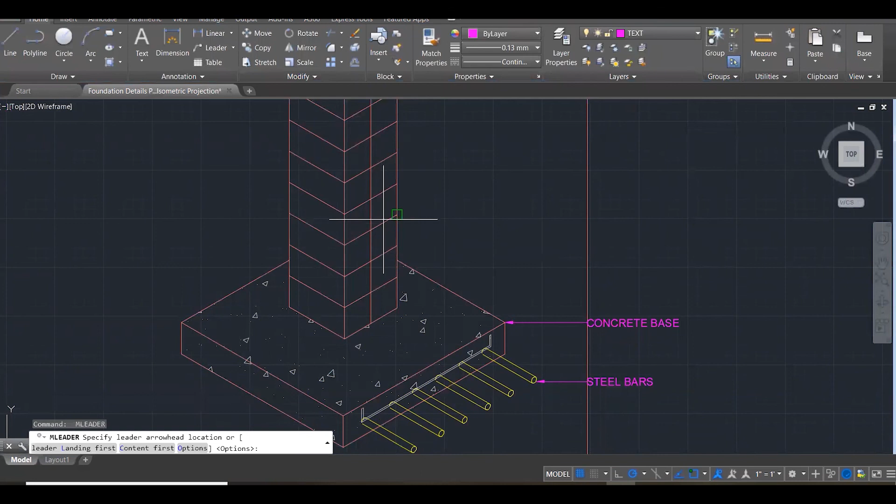This is the concrete base. This is the column. This is the brick, or block work, or block wall. And I'll put a slash there, column.

In this one, I didn't apply any plaster layer, as I wanted to show you guys how this will look before we actually apply the plaster. All right, what else do I need to insert here?

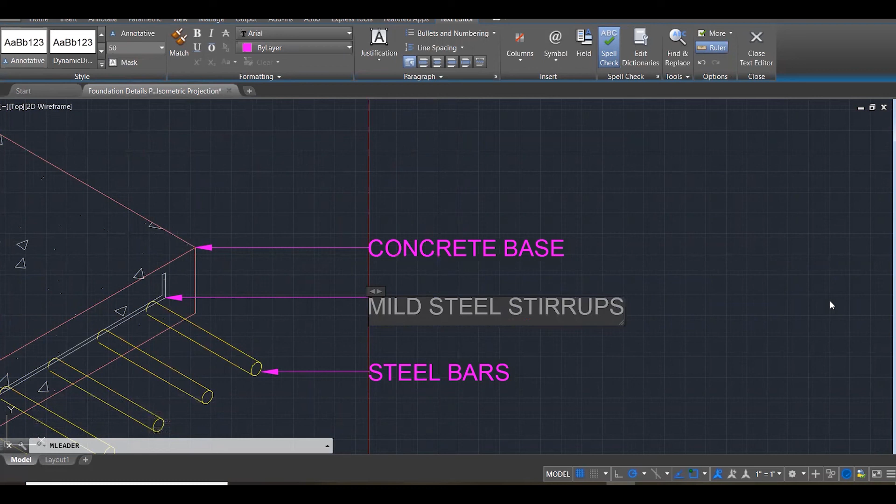I'm thinking, oh yeah, the stirrups, introduce connections here. So can I get it in here? Yeah. Mild steel stirrups. Stirrups.

Right, and that's how this whole thing would look.

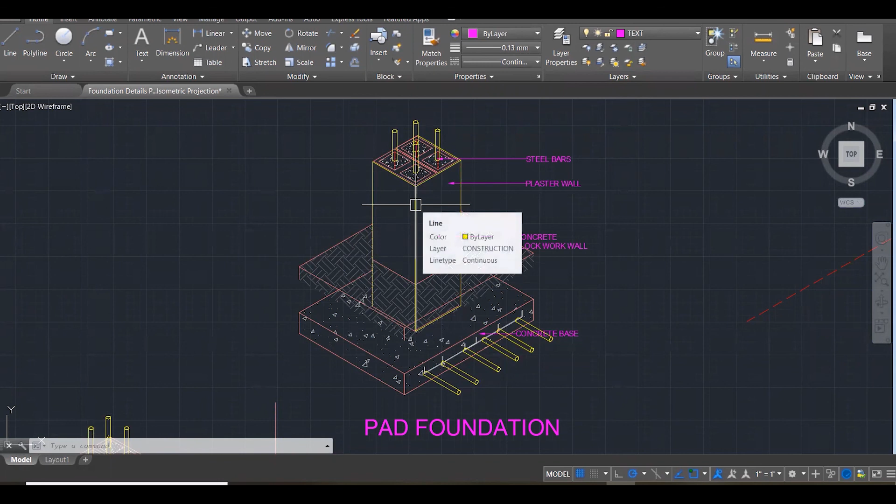So let's look at the difference here. We've got our steel bar. This has a plaster wall to hide the lines of when you lay the bricks on top of each other, so the plaster wall hides that.

Pretty much the same, I just haven't represented where the earth would be on this one. I don't think I'm going to do that, might be a bit confusing. So I'm just going to copy this over here, and this would be our pad foundation, pad foundation isometric. Right, isometric.

And we have here our midpoints. Why do we have these midpoints and these red lines? That is one tool you can use to distribute your columns evenly by placing these grid lines, used to make sure our columns are placed at equal distance. That's why I have those red lines there.

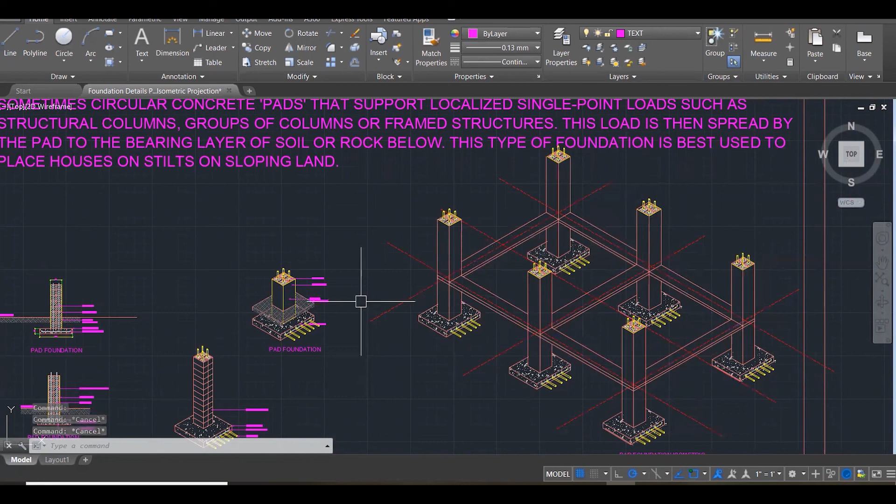Okay, so this brings us to the end of pad foundation. I hope you guys learned something new from this. Just before we finish off, to recap, pad foundation is basically used to place houses on stilts on sloping land.

This is what it will look like in orthographic projection, where we have the mild stirrups, the concrete base, the steel bars, the plaster wall, and then the column wall going all the way up to where you would start casting your floor, etc. And this is how it would look in an isometric projection.

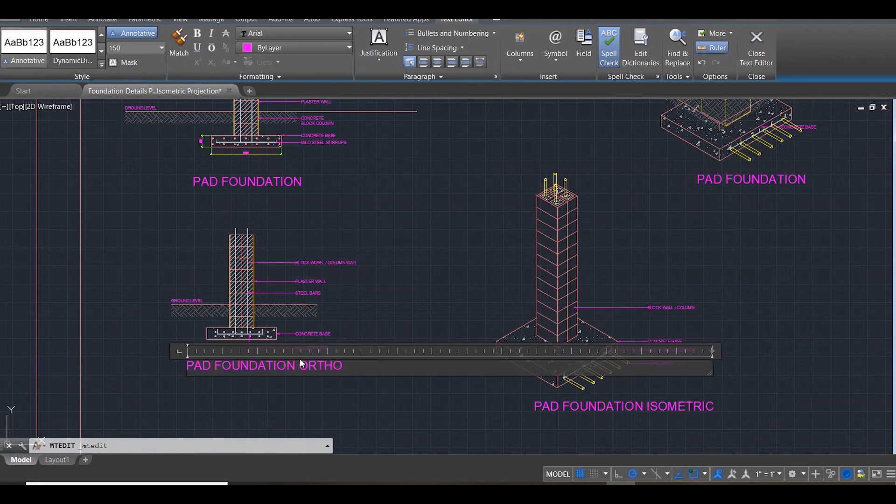So what I can do to distinguish these is label this pad foundation, orthographic, and this is isometric.

I hope you guys understood this a little better and you're able to draw this and understand where it would be used. I always encourage you guys to practice and practice more to get this and understand the notes, how to label this. You should be able to draw this from either orthographic or isometric projection.

All right, this brings us to the end of pad foundation. So far we have done strip foundation, we have done raft foundation, and now today, pad foundation.